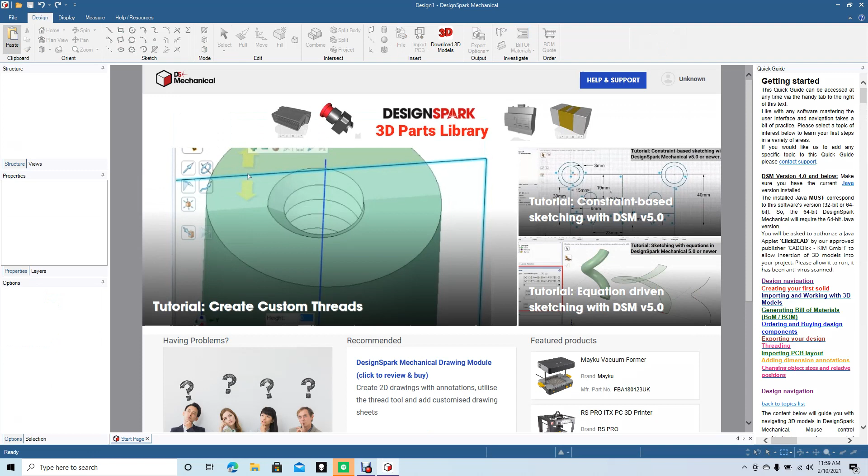Today's tutorial, I'm going to show you guys how to create a paperclip and how to use the Revolve tool in DesignSpark Mechanical, or the sweep tool actually.

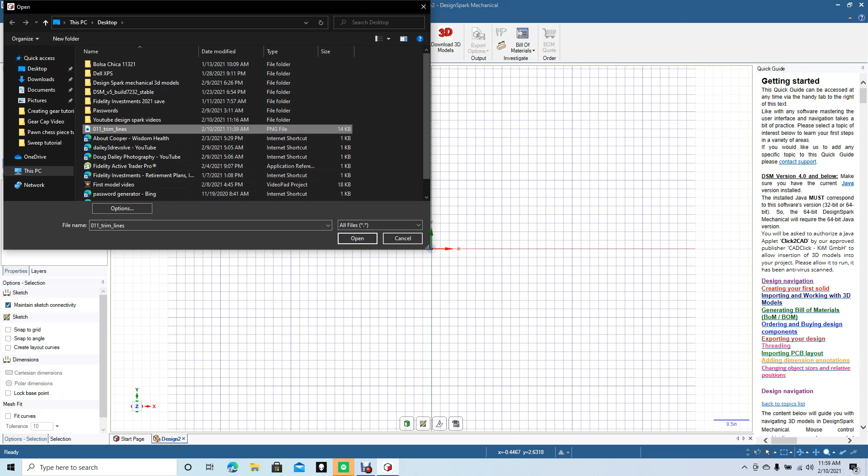Okay, we're going to go ahead and create a new design. Click the eye icon to change the view. Then I have a reference file, so we're going to go ahead and import that reference file. Make sure you change your file types to all, and then go ahead and click on your import file and import it in. This is our file here.

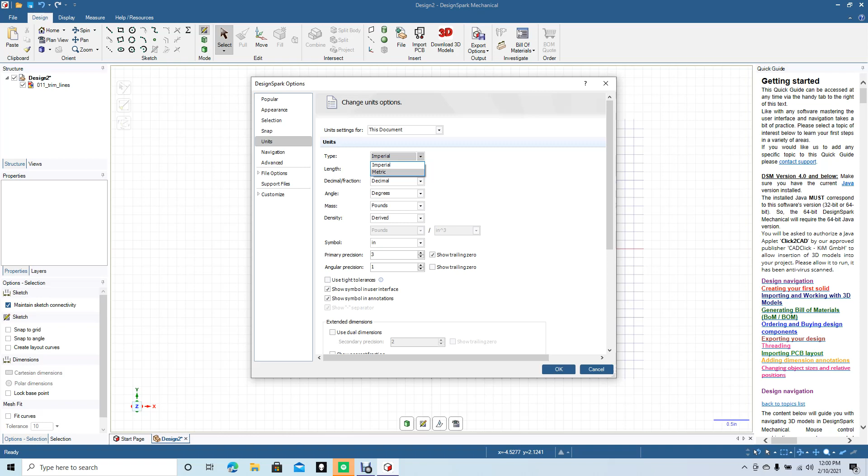Right now my measurements are set up for inches, so to change them to metric, you go to File, go to DesignSpark Options, go to Units, and then go ahead from here, change them from imperial to metric. It's just that easy. Then click OK.

I'm going to start off with a reference line just to see where we are with this part. Okay, 31 is what it should be.

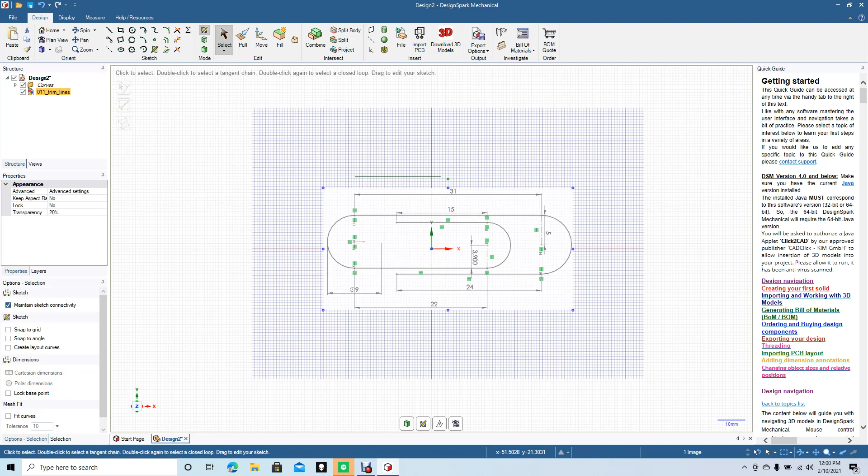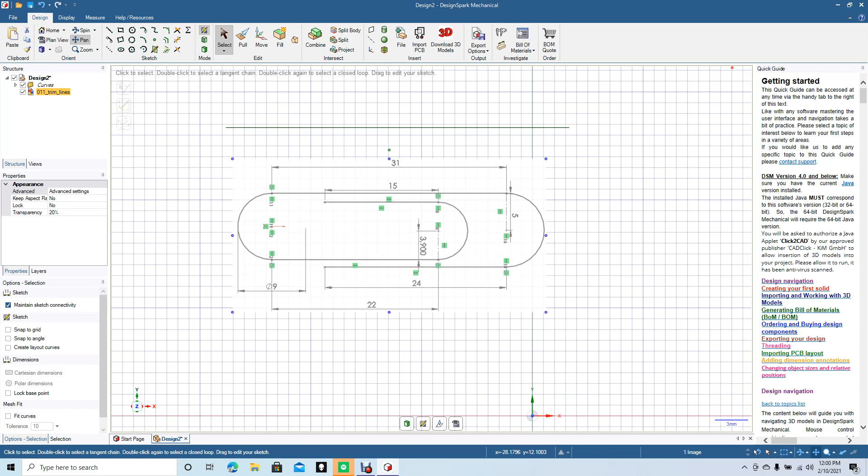That's pretty small, so we're going to have to reduce down this reference drawing. Go ahead, hold the Shift key down, reverse that, reduce that down. Control plus will actually zoom in, so I'm going to zoom in twice. I'm going to pan down, pan down to there. It looks like the part still needs to be a little bit bigger. So we're going to go ahead and blow the part up a little bit. Click on it, hold the Shift key down, and zoom in. And zoom it up. Okay, a little bit bigger.

Okay, that looks like that's about right. So delete that reference line. Okay, let's start drawing this.

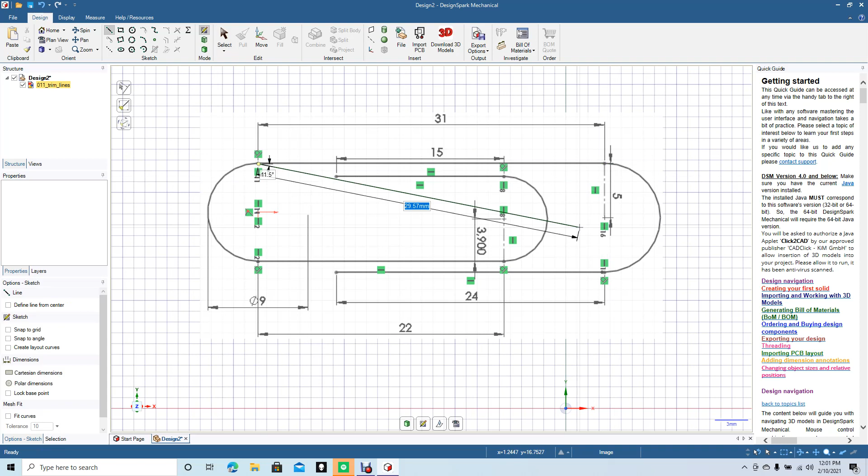So I'm going to go from here to here is 15 or 31. Okay, click off of that. And we're going to draw the 3-point arc. The 3-point arc is going to be 10, so it's going from here to here, so 10. And we need to snap it over to there.

This is where it would be helpful to have your snaps on. Right there. Okay, so now we're going to go ahead and put another line in there. So the line's going to go from there over to there. And it's going to be 24 millimeters. Go ahead and click that.

Okay, now we need to put another 3-point arc in there. It's going to go from here down to here, which is going to be 9. So go ahead and click 9. Now the snaps are on, so click there.

Okay, now add another line segment from here to here is going to be 22. Okay, click off of it.

Now this one is like 3, 6, it's almost 8. So we'll just make it a little bit smaller. It doesn't have to be perfect. So we'll go with 3-point arc. Go from here up to, let's just go there. I need it to be a little smaller anyways.

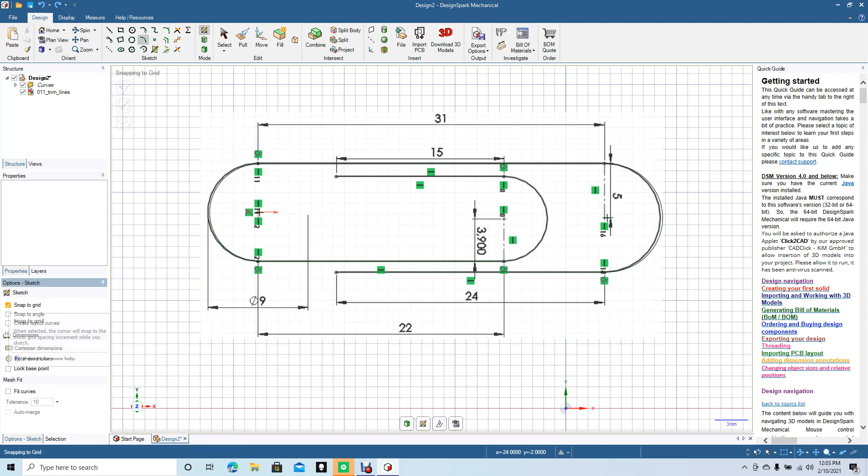Well, that's a little bit too far off. So let's turn off the snaps. Draw the 3-point arc again. From there to there. Snap it. And then we're going to draw one more reference line, one more line from here to here. It's going to be 15.

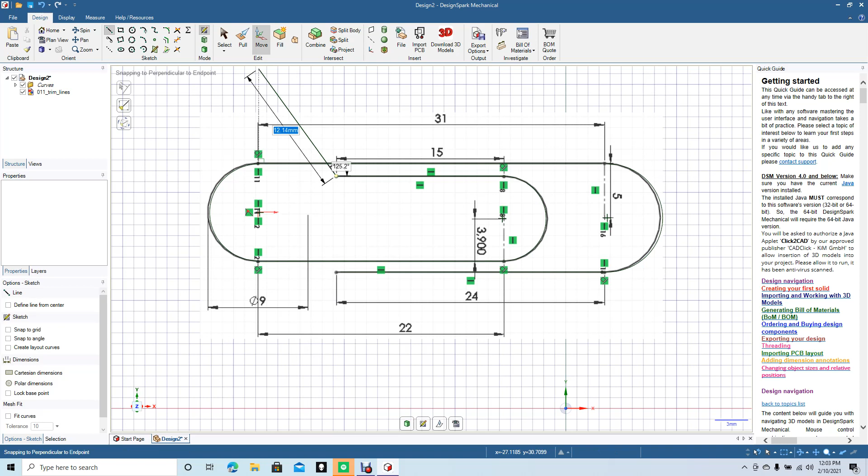Okay, there we go. Now we no longer need the reference file, so we're going to delete that. Well, it looks like something happened there, so I'm going to have to delete that line. Add a new one in there.

Okay, now we're going to click over to 3D view. We'll rotate the drawing slightly with the spin tool. And we're going to select that end right there. Come on. All right, select right there. I'm going to add a circle.

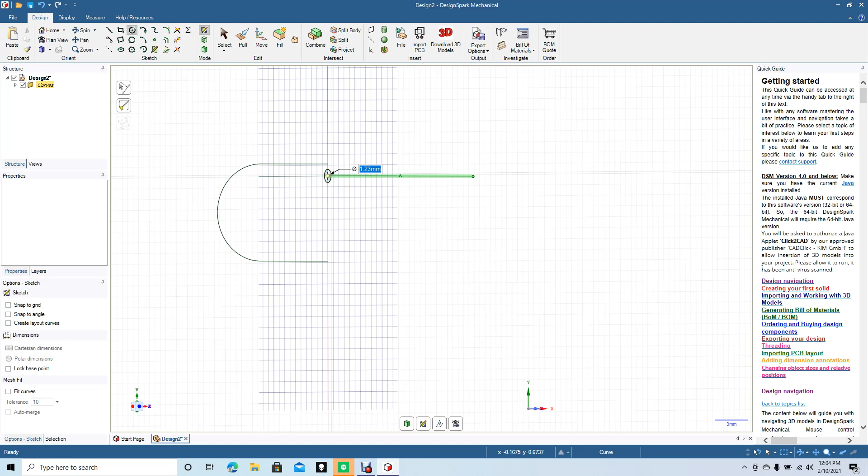Right there, add a small circle. It has to be 0.8. Okay, change that to that. Let's go to the pull tool.

Zoom in. Select that, zoom out. I'm going to sweep along this path here. Select the arrow. For some reason it's not sweeping. All right, let's go. Sweep.

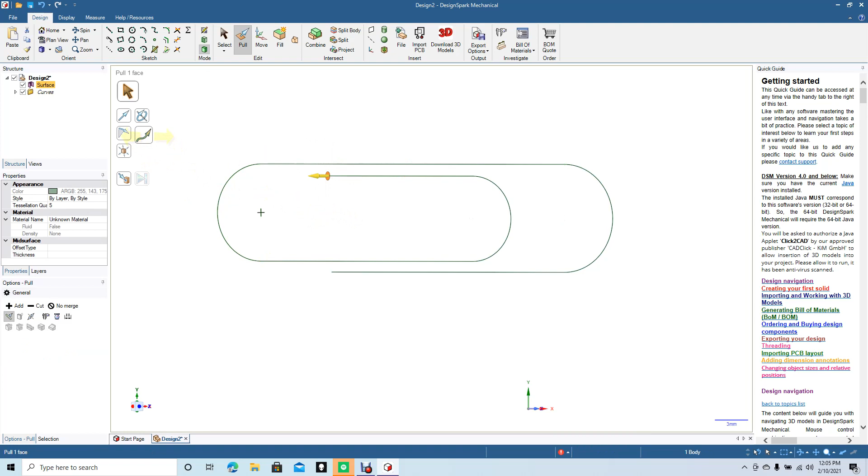Okay, let's go to view this, top view. Okay, that's going to end today's lesson.